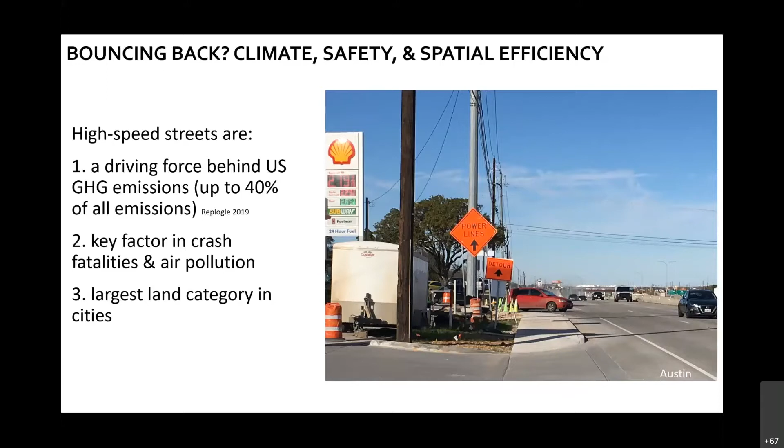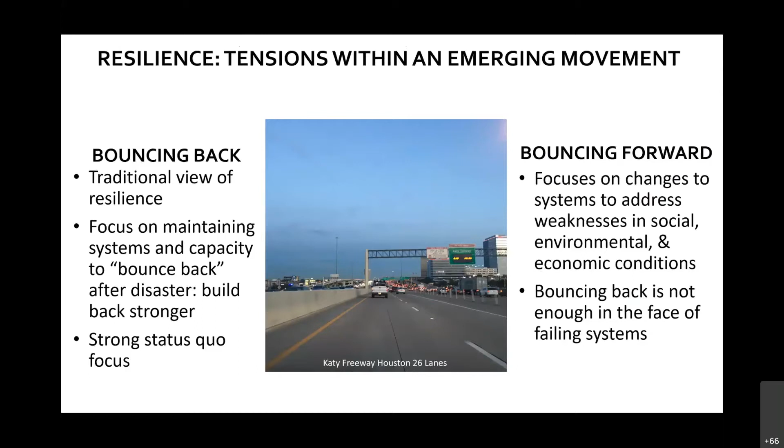So the idea is, how do we move from this sort of bounce-back approach to transportation that really focuses on the status quo, to changing our systems to address social, environmental, and economic weaknesses, to bounce forward from failing systems to produce something better—some streets that really are livable, healthy, decrease greenhouse gas emissions, and are adapted to the changing climate.

So what we did is we looked across the literature and we came up with an idea called adaptation urbanism. It's an exploratory approach. We look at best practices from around the world, and we put these in the context of an urban resilience framework.

Basically, what we did is come up from that review of the literature, and we found essentially that compact development, sustainable transportation, blue and green infrastructure, and equity are at the core of what creates great streets and public spaces. And what we did is we used those terms to frame our research.

The goal really was, how do we create climate adaptation and climate mitigation and push that down to the level of streets. So in our research, what we did is we looked at case study cities, mostly from the global north, you'll see here.

So we looked at Copenhagen, London, Rotterdam, New Orleans, and Miami. We also did a more in-depth analysis in a policy chapter at the end, looking at Amsterdam, Barcelona, Delft, Utrecht, and Vancouver, and looked at what sort of street projects we're seeing there.

As we surveyed these cities around the world, essentially what we found is that in some cities, you're seeing this real jump forward to streets of the future that are using climate adapted and climate mitigated technologies. And in many cities, you didn't see that jump forward.

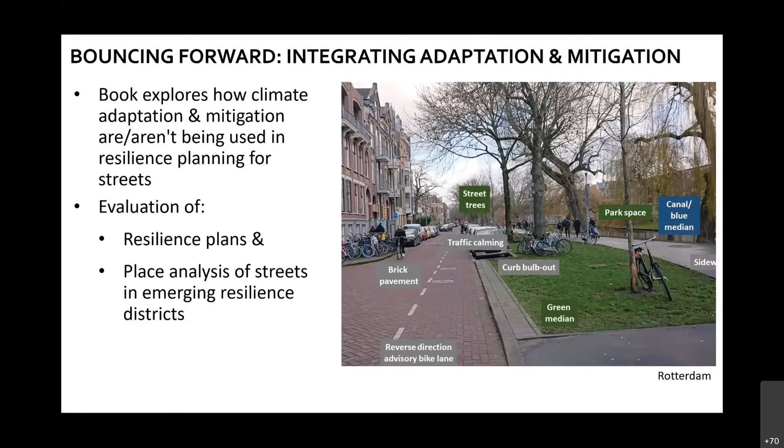And that was really the idea of linking plans to places, to look at what's happening in terms of resilience policy—how do we bounce forward? As we said, Copenhagen and Rotterdam were really meeting a number of these indicators, and some of our other cities weren't.

An example from Rotterdam is the Zoho Resilience District. We saw resilience districts as a great example of pushing these ideas forward, of taking plans and implementing them. What used to be a street environment was turned into a water garden. The barrels you see come down from the train tracks above and fill up with water. If there's a drought, the water comes out into the water garden, and they refill at other times. This shows the opportunity to take street spaces and address water concerns, whether drought or too much water, while creating spaces that are excellent for livability and for walking and biking connections.

We're moving away from streets being the driving force behind greenhouse gas emissions, high crash rates, impervious surfaces, and spaces of division, and moving towards spaces of low greenhouse gas emissions, low to zero crashes, places of connection, and spaces for water.

We found that a number of places in the world are doing this right now. So we're redefining streets, moving away from the streets of the past. If you look up the definition of a street, for example in Webster's, it's 'that part of a street reserved for vehicles' - a very narrow definition that matches Le Corbusier's definition of streets from the 1930s.

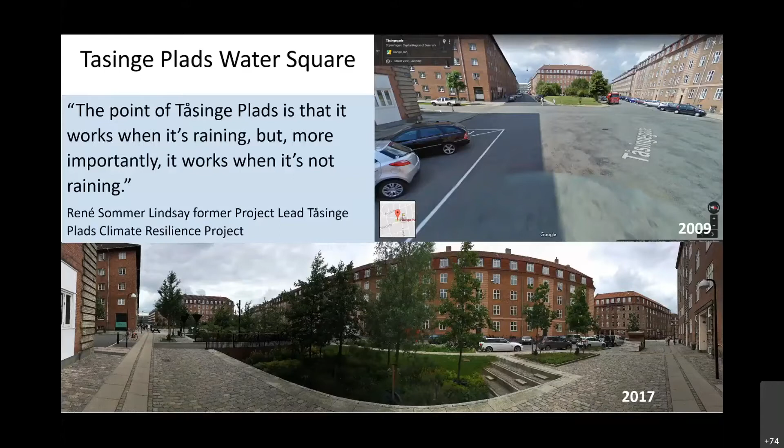Another space just to the north of this is Sankt Kjelds Plads, and this became part of the resilience planning district in the area. The goal was for Copenhagen to be carbon neutral by 2025, and then carbon adapted, where they can handle 30% more rainfall by 2040.

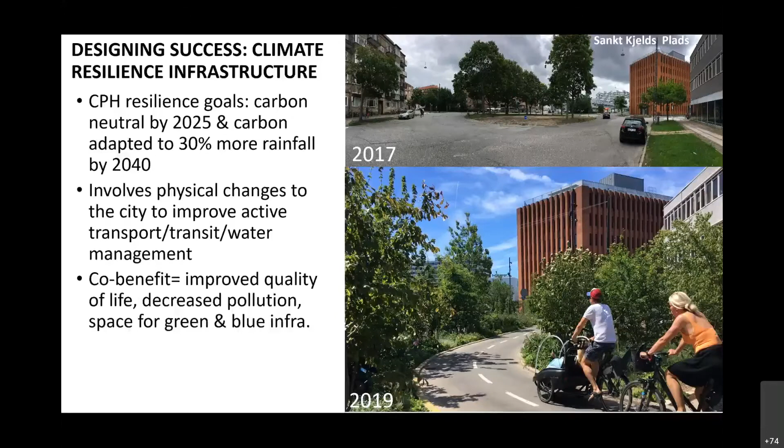What's great is this is something that happens in your mind—we need to be climate adapted, we need to be climate mitigated. Well, in reality, it exists. You can go to places and see what's happening. It's really exciting to see these changes.

My favorite small example of what you can do—you don't have to have a resilience district and make everything happen all at once. This is a street where they added, on the left, a little bioswale cycle track, and it's perfect. It's very simple. It creates a safe space for walking and biking that decreases greenhouse gas emissions, and it's climate adapted. So what we need to do is stop building streets of the past and start building and retrofitting safe green streets linked to cycle tracks with green infrastructure.

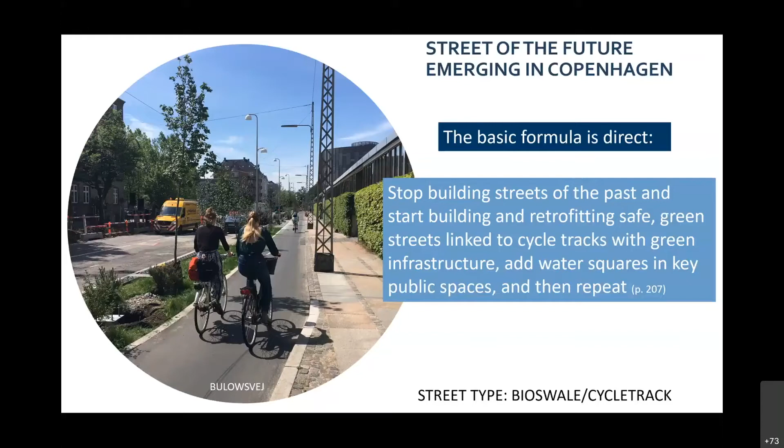We can add the water squares like you saw from Copenhagen before, and then we need to repeat. This is adaptation urbanism in practice.

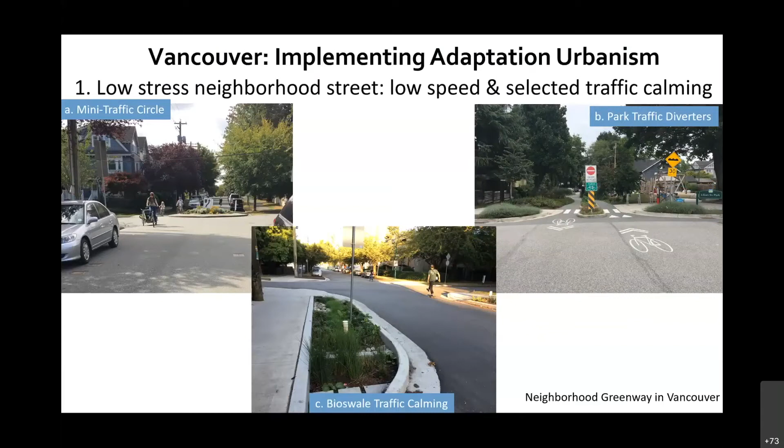I want to give you an example of how this could work in a North American context, in Vancouver. Small mini traffic circles that slow down traffic, green infrastructure inserted into a park setting above, and small bioswales inserted into the street networks. Downtown, you add cycle tracks with green separation. This creates safe Vision Zero types of spaces, and it's climate adapted.

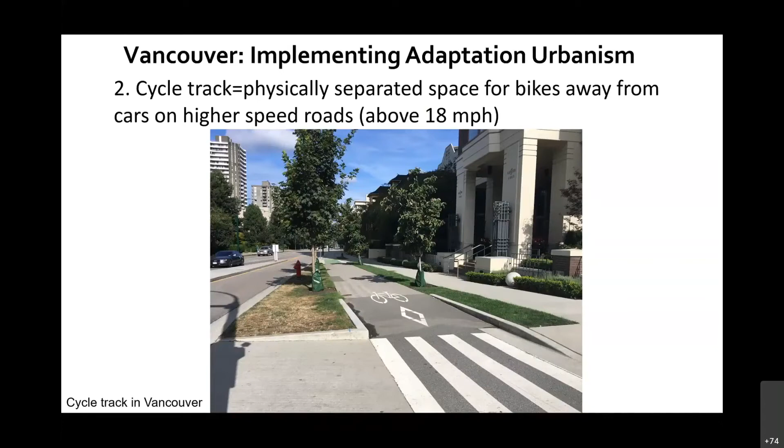Really fantastic and straightforward. We have the technology to do this today. We don't need—and we can always use more technology, that's good—but we know what to do. We just need the political will to do it. And when we do this, you also create great spaces.

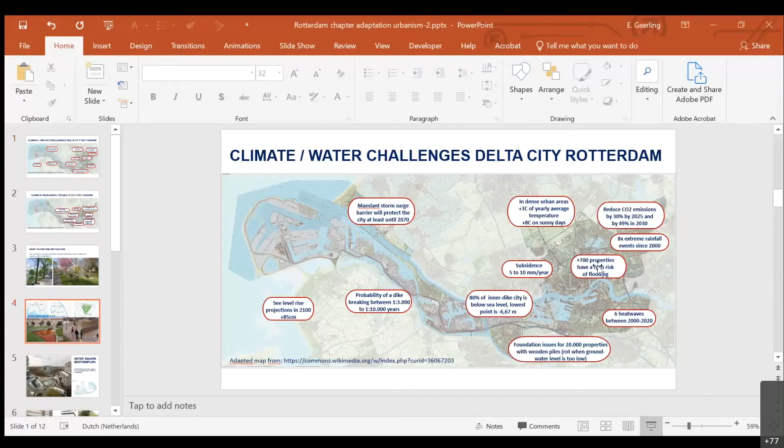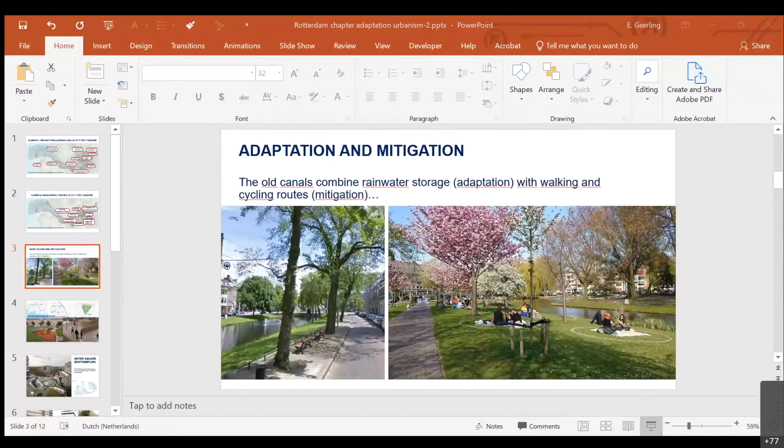Now you can. So this was the old canals. So I have to still put them on to go forward.

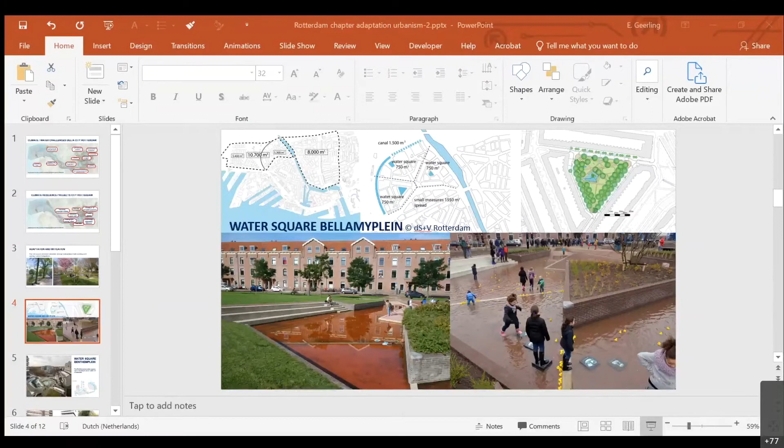So the new strategy of the city, can you see the current one, is adding water squares. What they literally do is looking per neighborhood how much water storage is needed, and then translate that into public space to make amenities that are 24/7 actually very nice to visit. And only in times of heavy rainfall they can store a lot of the rainwater that's just needed 5% of the time. I think this is the most famous water square.

Many people from abroad come and visit this one. So you can do it in a green way, in a soft way, but you can also do it in a more architectural way. Around this square, there are many office buildings. There's a big school. There's all kinds of amenities. There's also a church, as you can see.

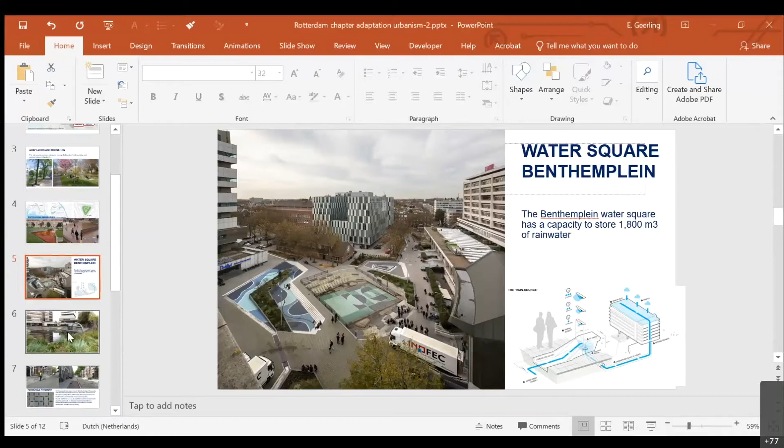And the rainwater from the rooftops, but also from the surface, is led to those three basins. So when it's a heavy rainstorm, like we had a few days back, it fills up. And then when the sewage is empty again, so the water is relieved, as you can see here.

So then it's looking like this. And then it's still a nice square. You can still play with it. It's just a little bit different.

So this very simple measure of changing pavements, you can do it in historic neighborhoods and use the red ones, but also in newer streets. It's just a simple way of making the whole area more permeable. So not putting all the money in enlarging the sewage system, which is very expensive, but making nice public spaces that are always nice.

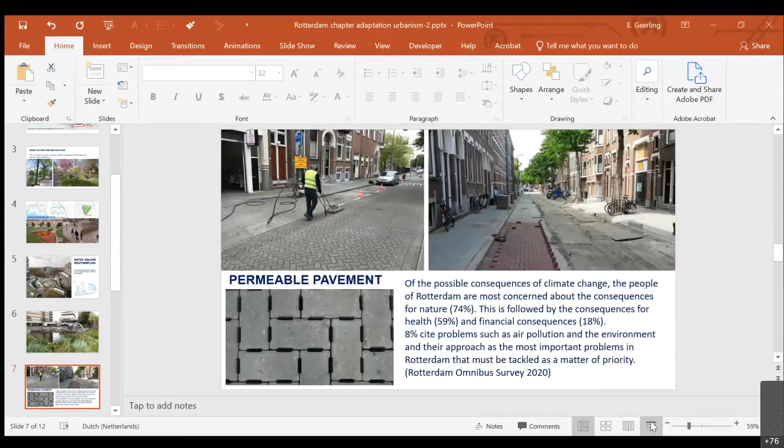So in Rotterdam, they also have now a program where you can challenge the city. So I'm no longer working for the city government. I'm now working for University of Applied Sciences and train students on water management and spatial planning and the combination of the two.

So what we did was also, and we had the canal next to us, add more green spaces, do traffic calming, and also add all kinds of nice amenities. So we made the whole plan together with all inhabitants. We challenged the municipality and got some money to organize the whole participatory planning, but also make the design ourselves.

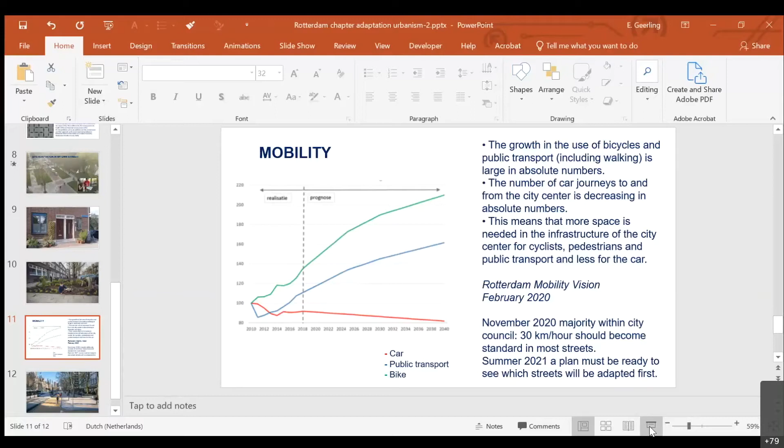And what was very nice is that just recently, last November, the majority within the city council voted that all the streets where it's possible should be changed into a 30-kilometer street. Probably you all know that casualties will go down a lot when it's changed from 50 kilometers per hour into 30. And where this is being implemented is in the main street of Rotterdam.

So this is my last slide.

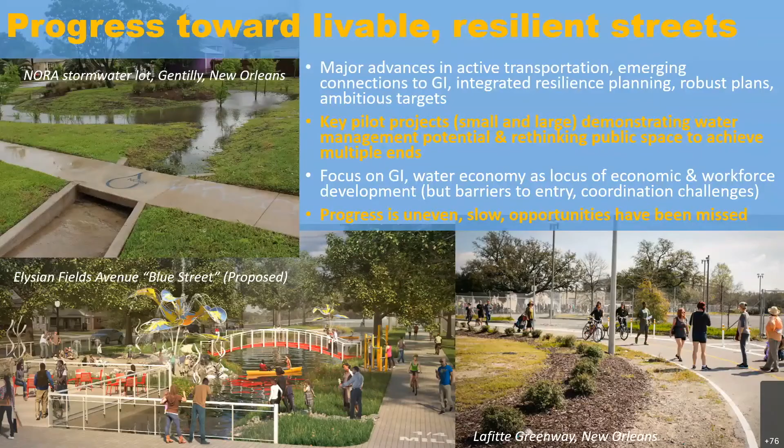Simultaneously, the city has come to understand that the water economy and adaptation are an important economic and workforce opportunity and has been investing in developing this sector with now a focus on racial and economic equity. So as with the Gentilly Resilience District, this is largely a grant-funded effort at this point, but the idea is that these are supposed to lead to bigger systemic changes in our policy and our planning that will make that kind of integrated thinking more of the status quo in the future.

In the meantime, things are a little slow. Progress is kind of uneven, and we've missed some opportunities along the way, but we're making progress.

So meanwhile, New Orleans has also been tackling one piece of the other side of the climate coin, which is the emissions mitigation, by encouraging non-automobile forms of transportation.

New Orleans has always been a city where a lot of people walk and bike. This has only increased in recent years in concert with consistent incremental investments in better infrastructure. So most recently, the city made a commitment to add 75 miles of new bikeways over 2 years, and the implementation of that is underway as we speak.

And for the first time, these projects were really explicitly intended to center on lower income neighborhoods, communities of color that had previously really been left out of where new bikeway infrastructure was coming in. And also their neighborhoods that have high rates of no vehicle households in the first place.

And so while a lot of the new mileage of bikeways in this case is coming from just simple roadway reconfigurations and not necessarily physically reducing the amount of space that we are paving overall, increasingly streets projects are starting to be considered more holistically to do multiple things, to address drainage, to manage stormwater, as well as adapting for multimodal transportation needs. So several of the recent projects have incorporated green infrastructure elements.

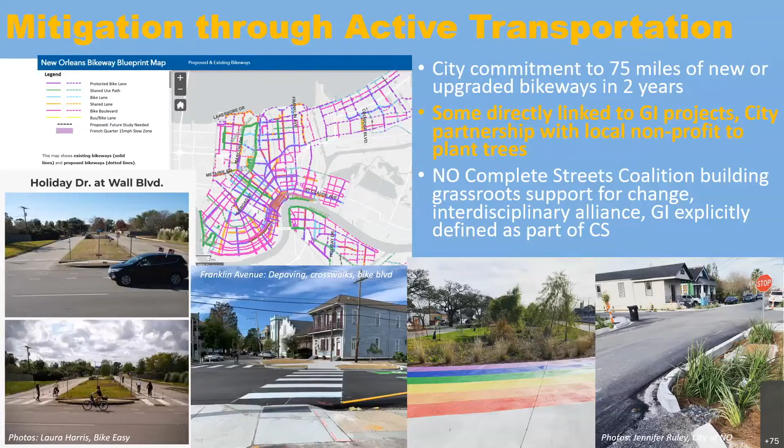So despite numerous promising advances and a lot of progress, there's definitely still a lot of work to be done here. As with pretty much everywhere, COVID-19 has exacerbated existing economic inequalities. New Orleans' huge tourism sector has been very deeply impacted, and there's not really an end in sight in terms of increasing housing prices.

In addition, we still have really serious safety issues to grapple with on our streets, so the mitigation potential of active transportation is still held back by our failure to meaningfully address these risks, especially on state corridors and other sort of trickier areas where local efforts haven't gone as far yet.

But the Green Streets approach that the city has begun to embrace is a really powerful tool for addressing both the flooding that impacts us on a seemingly weekly basis. I think we're still under a flash flood watch today. We were under one yesterday. It seems daily instead of weekly these days.

But it's also a way to take steps toward reducing emissions and meet the ambitious climate goals that we have set, while potentially enhancing community cohesion and livability for everyone.

Importantly, though, that cannot be done. Resilience planning cannot bounce us forward unless equity is really at the core of both the adaptation and the mitigation efforts. And specifically, in the face here of the effects of gentrification from multiple fronts and causes, and also reflecting our unjust histories of settlement and displacement, that really means that centering affordable housing is going to be an integral facet, or really a prerequisite, of resilience planning moving forward.

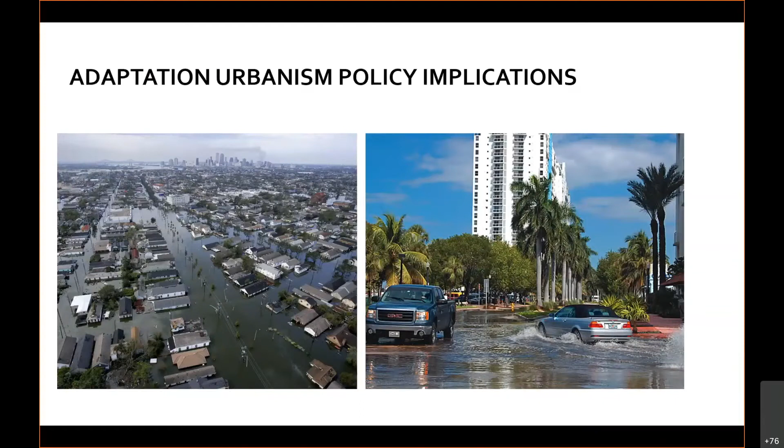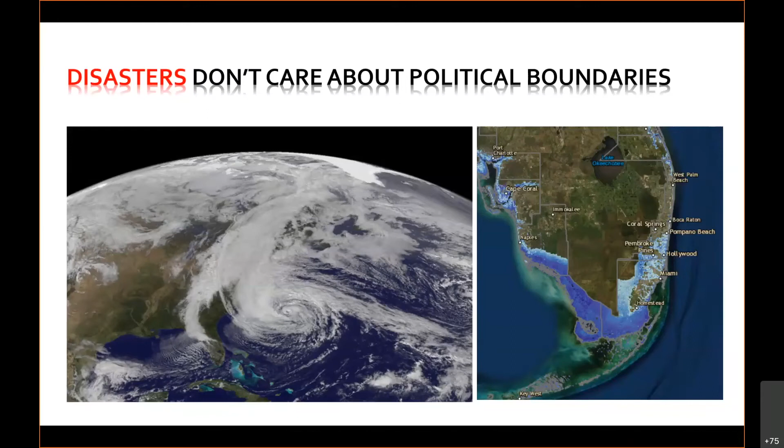So what we're proposing, in this bouncing forward idea—integrating and adapting our infrastructure while mitigating future climate emissions—is that we need to re-envision our streets as a central resilience platform, not just to achieve one goal, but to broaden out and look at safety, climate, equitability, and efficiency of space through different modes.

We want to substantively link funding to the core outcomes of policy concerns in the climate change era. And from a political standpoint, we want to build a linked agenda across worthwhile initiatives like Vision Zero, equity, climate, and smart growth and public health, and better stitch them together across multiple scales—local, regional, state, and national.

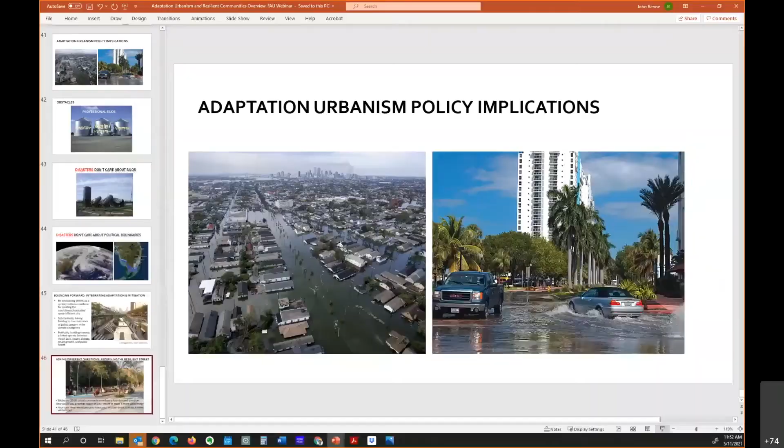Yeah, hi, I think I'm unmuted now. One of the questions asked by Shannon, I believe, is that the Netherlands is such a great example of how to do livable, equitable green streets. Given land use patterns in the US, how do we ever move toward a model like what we see in the Netherlands? I'm going to address that from the standpoint of the authors' concluding chapter—this will only take about two minutes, so it'll leave time for other questions.

In bridging the gap between the large region and the individual street, they say adaptation urbanism is about creating a new vision of resilient cities. So first you have a new vision. Then, number two, stop building streets of the past and start building and retrofitting safe green streets linked to cycle tracks with green infrastructure, add water squares in key public spaces, and then repeat.

They say cities should begin with pilot projects. These pilot projects are essentially building blocks for creating a sustainable and resilient region—resilient districts, much like we found in Copenhagen. So you have these pilot projects, and then everyone wants the same thing, so they replicate themselves.